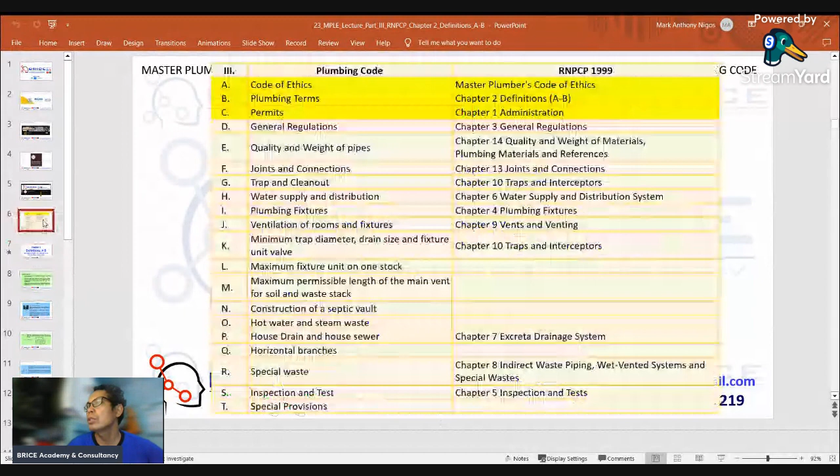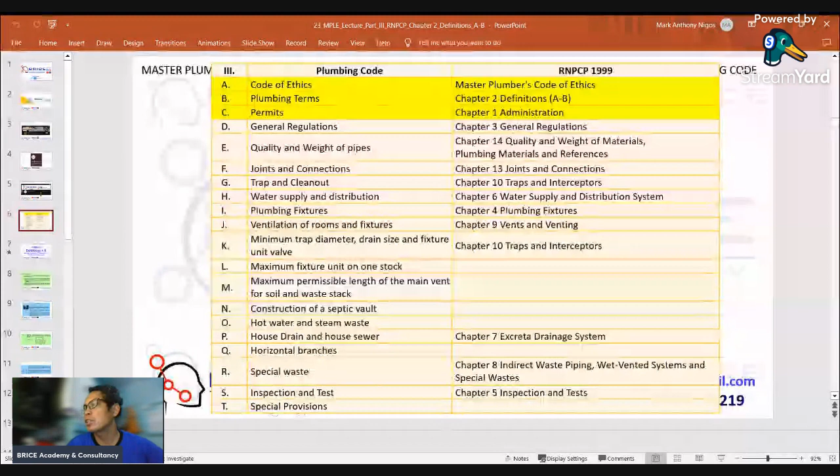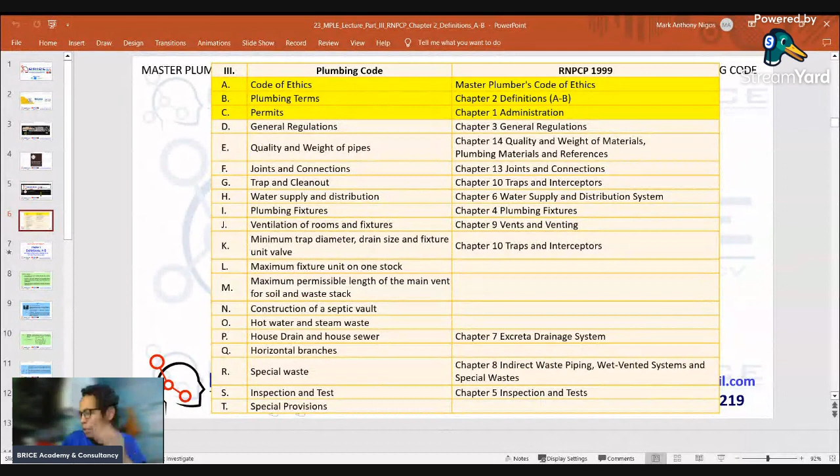Chapter 2, masyado kasing dami pagbubuuin natin siya. Ito yung coverage ng plumbing code sa board exam. Nung binasa ko yung coverage, ito siya, pinaturn ko siya sa Revised National Plumbing Code. So nandito tayo sa letter B, plumbing terms, definitions, A to B pa lang tayo. Madami kasi yan, kung ilalagay ko lahat, aabutin tayo ng ilang oras. Yung A to B nga, A to C nga, ang dami na. So hati-hatiin na lang natin para matagal, para hindi tayo ma-overwhelmed sa mga topics.

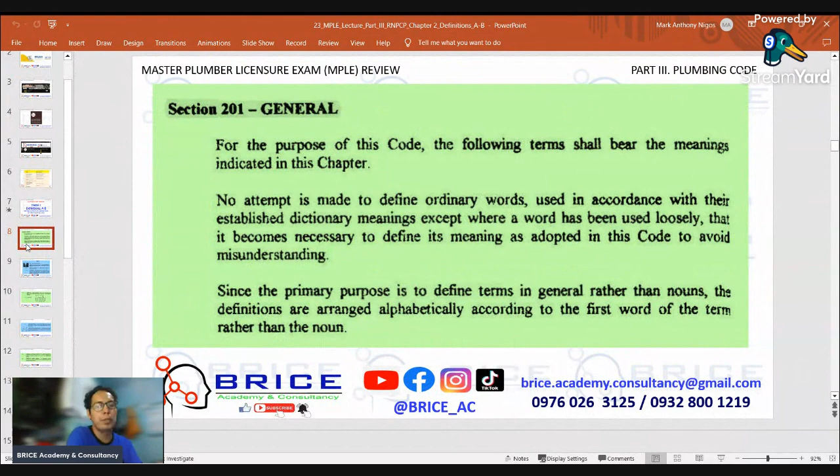ABS: acrylonitrile butadiene styrene. Next one, alley: any public space, public park, or thoroughfare less than 3 meters but not less than 2 meters in width, dedicated or deeded for public use. Another term, alter or alteration: any changes, addition or modification in construction or occupancy.

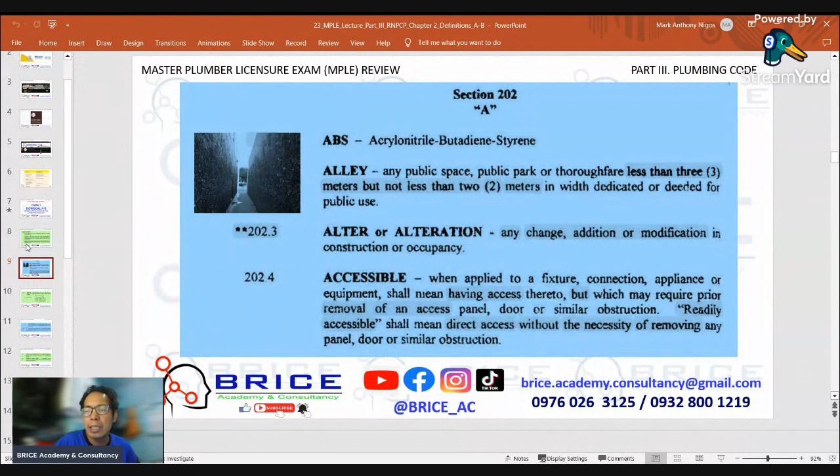Accessible, when applied to a fixture, connection, appliance, or equipment, shall mean having access thereto but which may require prior removal of an access panel, door, or similar obstructions. Readily accessible shall mean direct access without the necessity of removing any panel, door, or similar obstruction. Air break,

physical separation which may be a low inlet into the indirect waste receptor from the fixture, appliance, or device indirectly connected. Yan, meron ako nakita na reviewer, nandiyan yung air break.

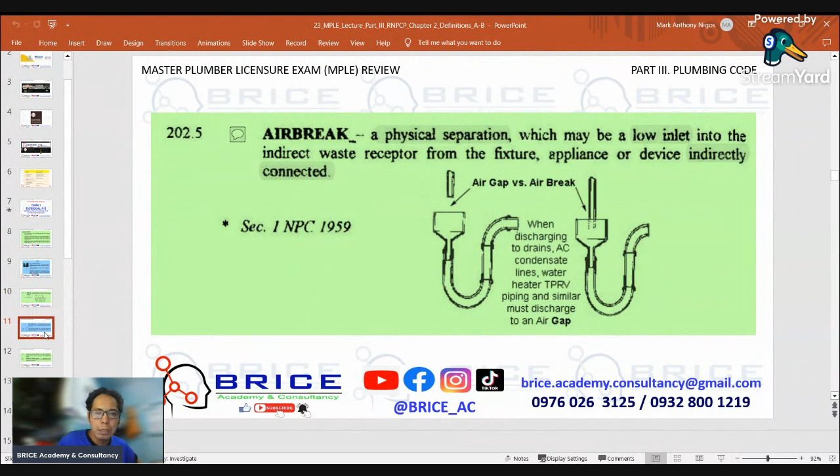Ito naman, air gap, and discharging to drains: AC condensate lines, water heater, TPRV piping, and similar must discharge to an air gap. Air gap drainage: the unobstructed vertical distance through the free atmosphere between the lowest opening from any pipe, plumbing fixtures, appliance, or appurtenances, conveying waste to the flood level rim of the receptor.

Air gap, water distribution: an unobstructed vertical distance through the free atmosphere between the lowest opening from any pipe or faucet conveying potable water to the flood level rim of any tank, vat, or fixture.

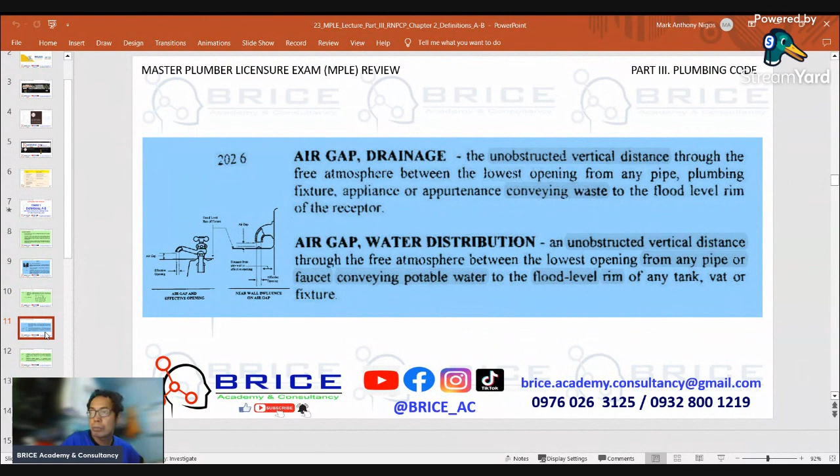Next term, approved: accepted, or acceptable under an applicable specifications or standard stated or cited in this code, or accepted as suitable for any proposed use under procedures and powers of the administrative authority. Approved testing agency: an organization primarily established for the purpose of testing to approved standards and approved by administrative authority.

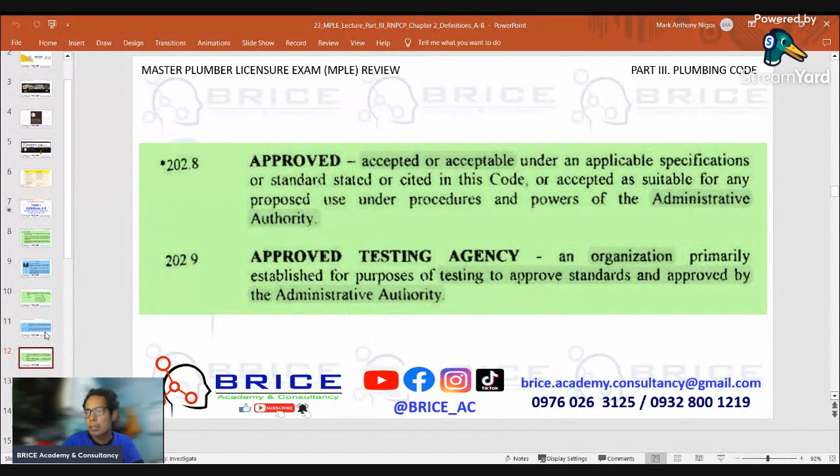Authority, administrative, hindi ko na yan babasahin lahat. Ano lang, authority: the administrative authority, including the building official, the commission, the board, and such other department or agency established and authorized to administer and enforce the provisions of Republic Act 1378, the Plumbing Code of the Philippines, Presidential Decree number 223, as amended by PD 657, creating the Professional Regulation Commission and prescribing its powers and function, and Letter of Instruction number 1000, ordering and directing the Professional Regulation Commission.

Wala palang putol to. The former Ministry of Human Settlements, the Department of Foreign Affairs, Education and Culture, Public Works and Highways, Tourism, Transportation, and Communication, all agencies concerned, authorize and support PRC-accredited bona fide professional organizations only, and their members to organize, host, sponsor, or represent the Filipino professionals in national, regional, and international fora, conventions where the concerned profession are involved, and further orders and directs that all government agencies and instrumentalities shall give priority to bona fide members of the accredited professional organizations in the hiring of its employees and engagement of professional services.

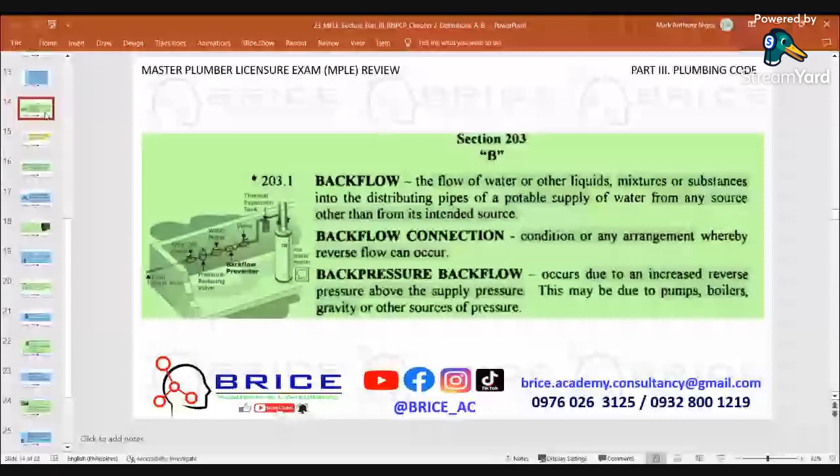Backflow preventer — a device or means to prevent flow of liquid from returning to the source of supply, also called vacuum breaker.

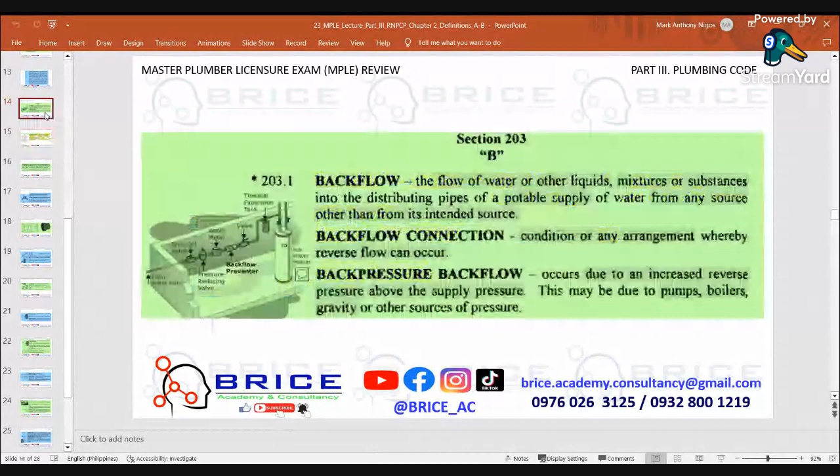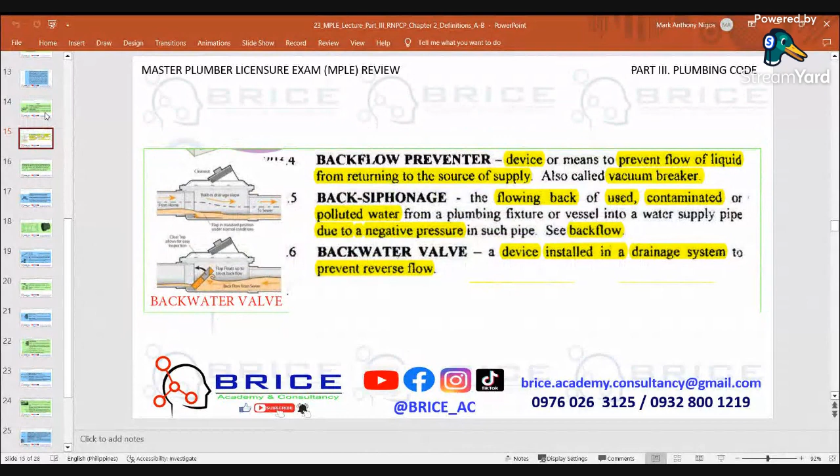See, there are so many terms, confusing right? There's back pressure backflow, there's backflow preventer — this one is a device. A device or means to prevent flow of liquid from returning to the source of supply, also called vacuum breaker. Backflow preventer, also called vacuum breaker.

Back siphonage — the flowing back of used, contaminated, or polluted water from a plumbing fixture or vessel into a water supply pipe due to a negative pressure in such pipe.

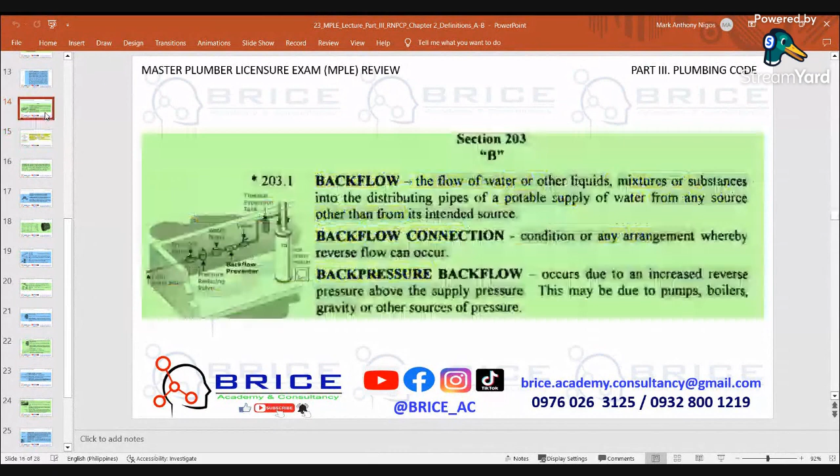See backflow — the flow of water or other liquids, mixtures, or substances into the distributing pipes of a potable water supply from any source other than its intended source.

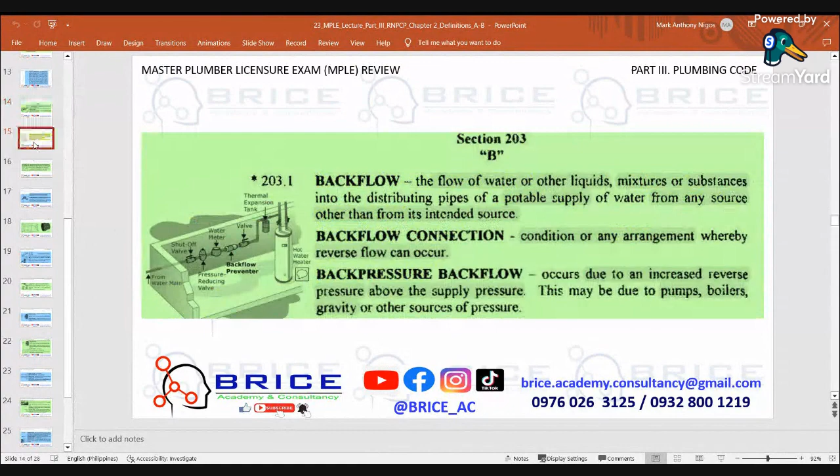So as it says here, back siphonage — the flowing back of used, contaminated, or polluted water from a plumbing fixture into a water supply pipe due to a negative pressure in such pipe.

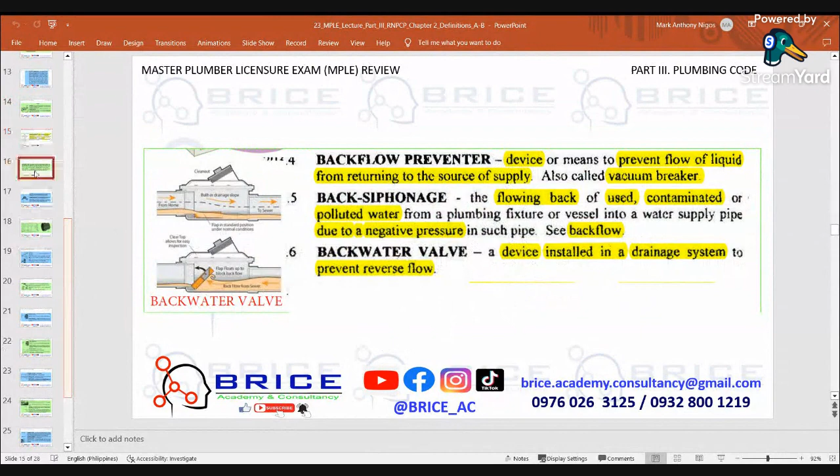Next, back vent pipe — the pipe part of a vent line which connects directly with an individual trap.

Underneath or behind the fixture, and extends to the branch or main vent pipe at any point higher than the fixture or fixture traps it serves. This is sometimes called an individual vent.

See revent pipe — we'll get to that one later. Back vent pipe: the pipe part of the vent line which connects directly with an individual trap underneath or behind the fixture, and extends to the branch or main vent pipe at any point higher than the fixture or fixture traps it serves. This is sometimes called an individual vent.

Ball cock — a valve opened and closed respectively by the fall and rise of a ball floating on the surface of the liquid.

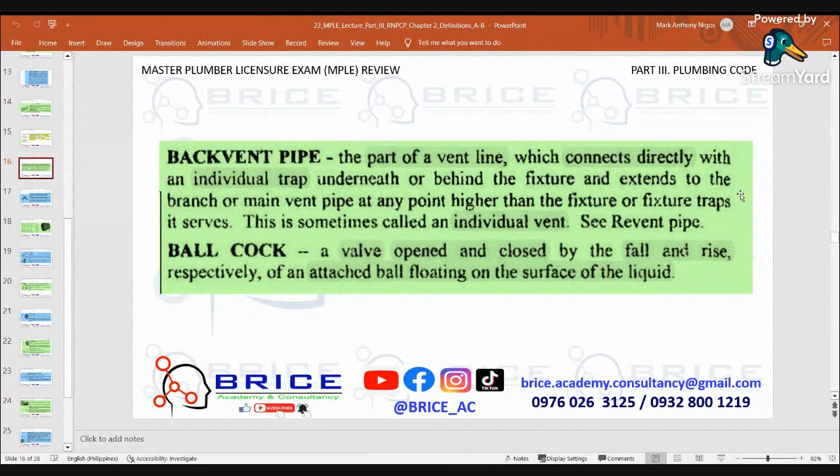Ball joint — here's the ball joint. A type of pipe connection in which a ball-shaped end is held in a cup-like shell, allowing movement in every direction.

Bathroom — a room equipped with a shower stall or bathtub.

Battery of fixtures — any of two or more similar adjacent fixtures which discharge into a common horizontal soil or waste branch. Bell or hub — that portion of pipe which, for a short distance, is sufficiently enlarged to receive the end of another pipe of the same diameter for the purpose of making a caulked or push-on joint.

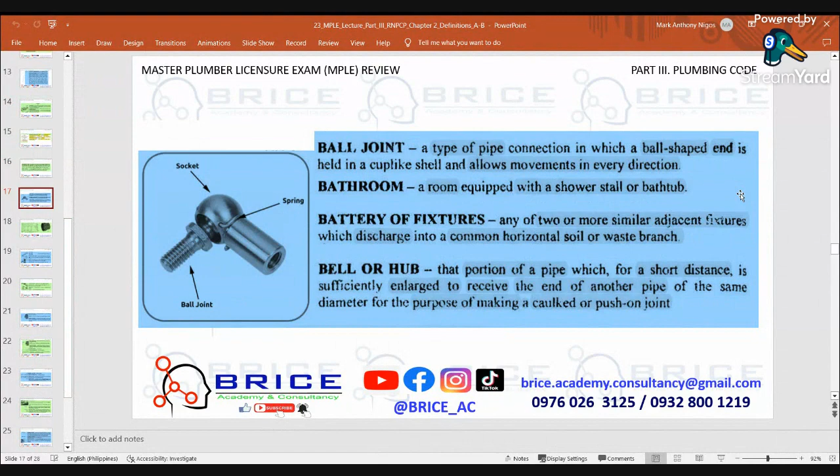Here's an example of a battery of fixtures — the horizontal main or waste connects the fixtures. And this here is the hub.

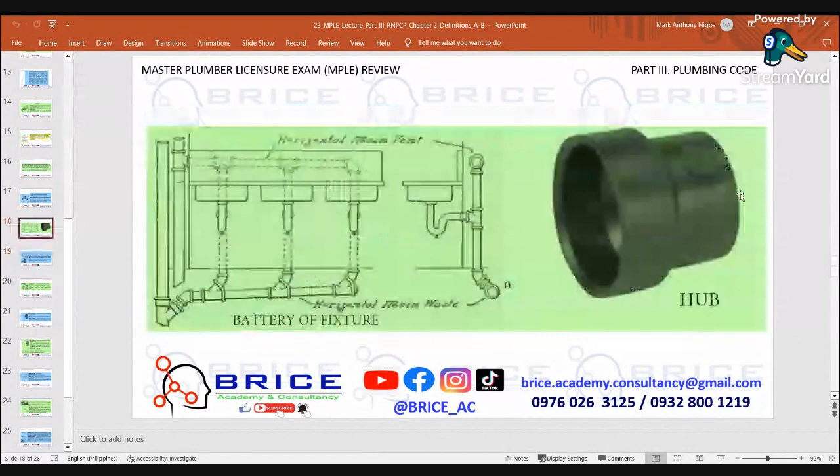Okay, where were we? Bending pin or iron — a tool for straightening or bending lead pipe. Here's an example of a bending pin. Bibb — synonymous with faucet, cock, tap, plug, etc.

The word faucet is preferred. Bidet — a plumbing fixture used for washing the middle part of the body, especially the genitals, also called a sitz bath. Blank flange — a pipe flange that is not drilled for bolt holes.

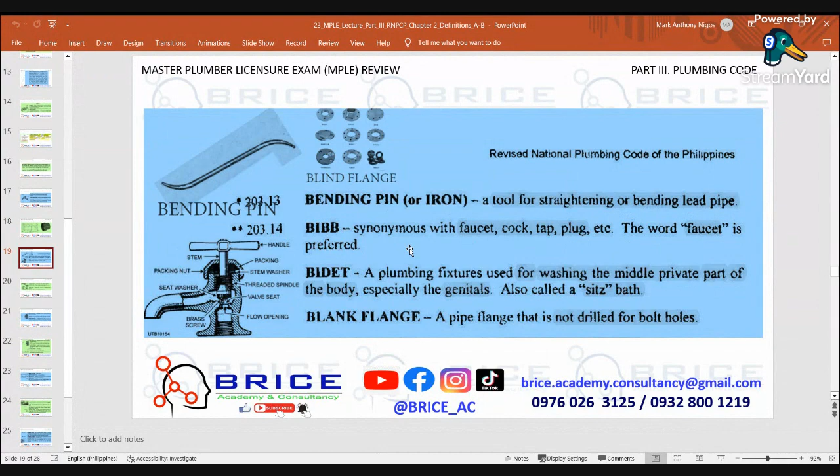Blank flange, a pipe flange that's not drilled for bolt holes. Blind flange, a flange that closes the end of pipe - there's no opening for the passage of liquid or gases. Blow off, a controlled outlet of the pipeline to discharge liquid or detritus. Board, the licensure board for master plumber.

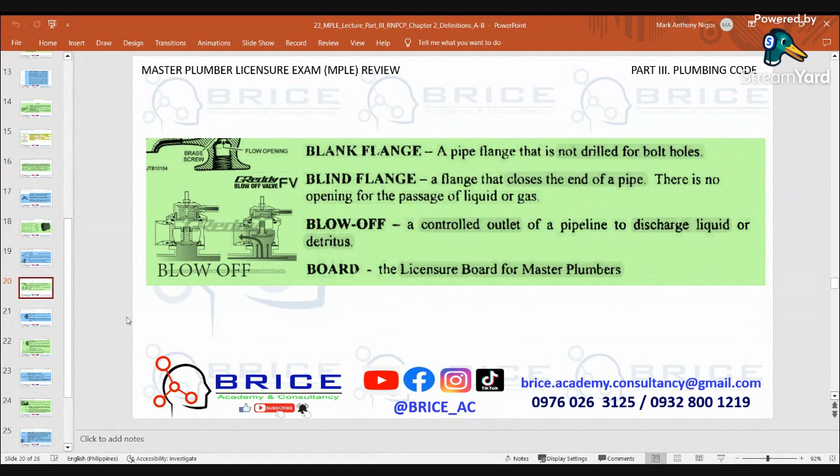Boiler blow off, a valve outlet of boiler that permits discharge of accumulated sediment. For example, boiler blow off.

Branch, any part of the piping system other than main, riser, or stack. Branch interval, a length of soil or waste stack corresponding in general to a story height, but in no case less than 2.43 meters, within which the horizontal branches from one floor or story of a building are connected to the stack.

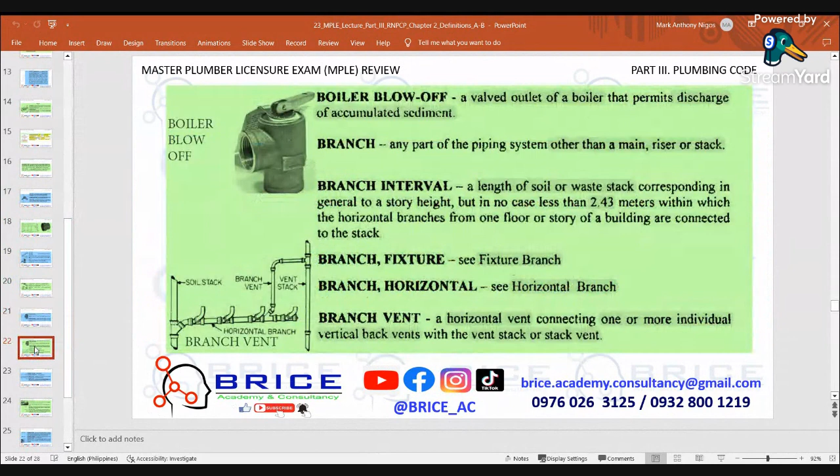Branch vent, horizontal vent connecting one or more vertical back vents with the vent stack or stack vent. That is the sample of a branch vent.

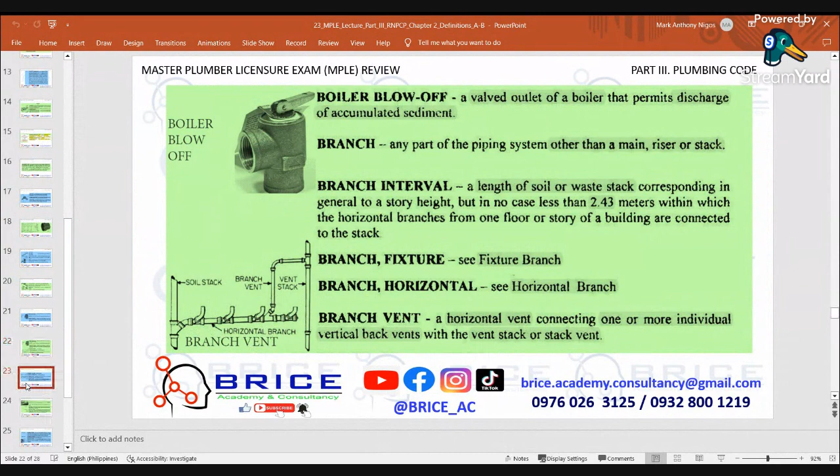Brazed joint. Any joint obtained by joining of metal parts with an alloy. Brazing is the joining of metal parts with alloys which melt at a temperature higher than 449 degrees centigrade but lower than the melting temperature of the parts to be joined.

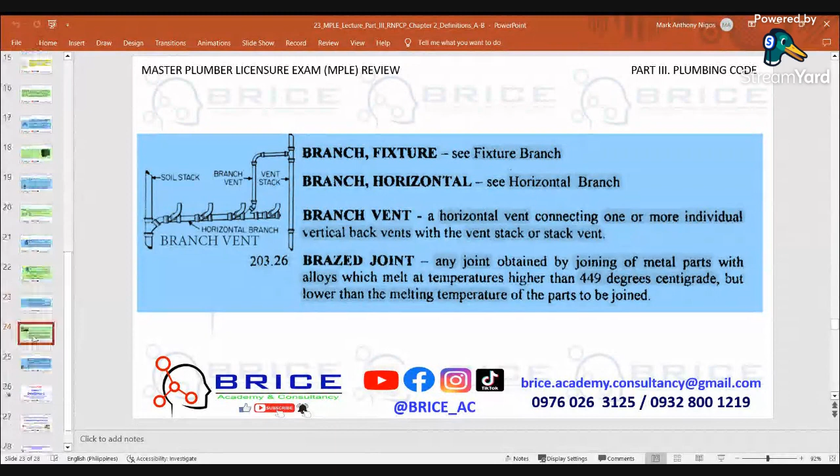Next, Brown and Sharpe, specification, or bell and spigot ends of pipe.

Building, a structure built, erected, and framed of component structural parts designed for housing, shelter, enclosure, or support of persons, animals, or property of any kind.

Building drain, that part of the lowest horizontal piping of a drainage system which receives the discharge from the soil, waste, and other drainage pipe inside the walls of the building and conveys it to the building sewer, beginning 0.6 meter outside the building wall.

Building drain, building subdrain - there's more. Building subdrain: that portion of the underground system which cannot drain by gravity into the building sewer.

Building sewer, that portion of horizontal piping of a drainage system which starts from the end of a building drain and which receives the discharge of the building drain and conveys it to the public sewer, private sewer, individual sewage disposal system, or other point of disposal.

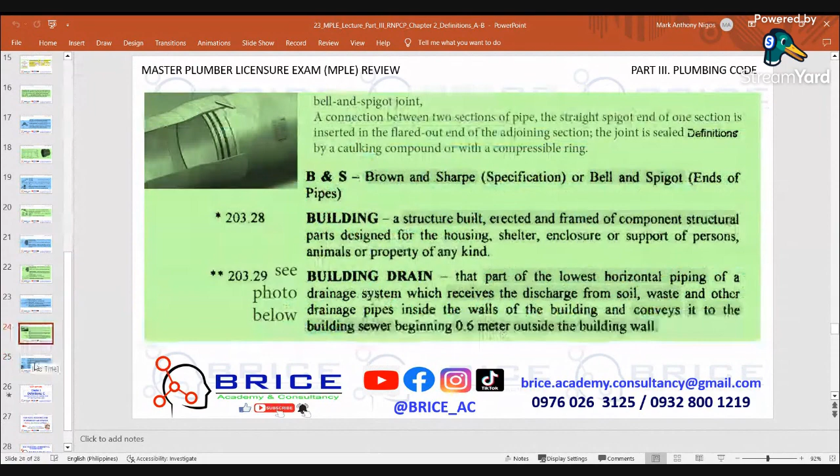So after coming from the building drain, it goes to the building sewer. That's the part of the system that starts from the end of the building drain.

Now, as for the building subdrain, that portion of the underground system which cannot drain by gravity into the building sewer. Building supply, the pipe carrying potable water from the water meter or other source of water supply to a building or other point of use or distribution on the line. Building supply shall also mean water service connection.